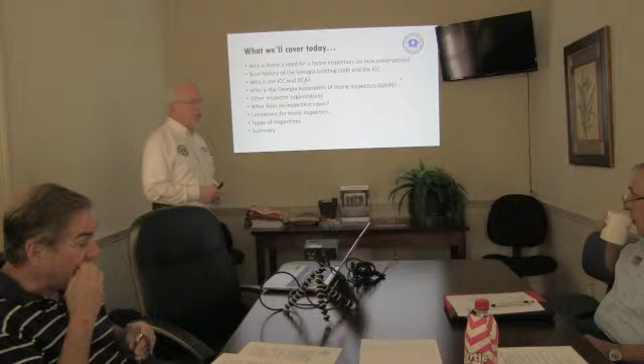GAHI is, to start off with the process here, we want to cover a variety of things today. To give you a beginning outline: we're going to say why you need a home inspection, and on home inspection on new construction, that's one of the public questions. We're going to talk about a brief history of the Georgia building codes and the ICC. We're going to talk about who the ICC is and who the DCA is. Some of you probably are not familiar with the DCA, but we'll talk about what that is. We'll talk about who the Georgia Association of Home Inspectors are, and a little bit of background on them. We're going to talk about other inspector organizations briefly, and we're going to talk about what an inspection covers, limitations, types of inspections, and then we'll have a summary.

So why is there a need to have a home inspection? A home is typically the largest investment your client makes in their lifetime in most cases. An inspection can save you money in the long run.

So what does that mean? It means that if you do an inspection on a pre-sale property, before you list the property, or the property being listed, have the property inspected - you then get the opportunity to see, before an inspector comes in from the buyer side, what issues there are and probably what you want your client, at least at that level, to look at, address, and deal with. It also provides a potential selling tool.

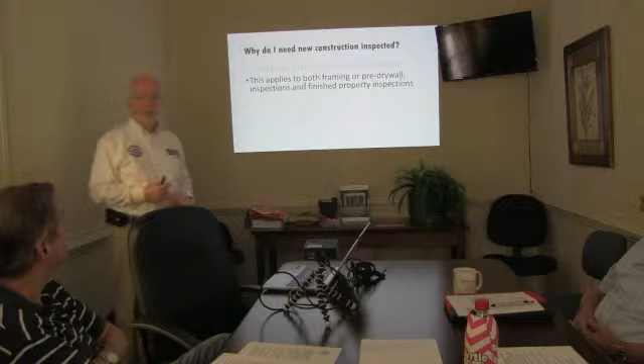This applies to both framing or pre-drywall inspections and finished properties. Probably the most common inspection process for new construction is what's called a two-phase. We've done hundreds of them. Larry Parkman and Richard, we all do phase inspections on new properties, meaning we come in most commonly at what's called a pre-drywall, where everything's put in place before drywall covers it up, and we inspect that. The second phase is the finished inspection.

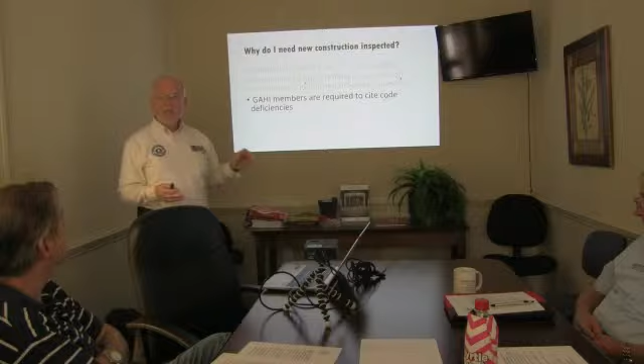GAHI members, Georgia Association of Home Inspectors, are required to cite code deficiencies. I'm sure many of you have worked with a builder who says, if I'm going to have a private inspector come in, he has to be code knowledgeable, because he doesn't want somebody who doesn't really understand the code citing stuff that isn't pertinent. And that does happen, we'll get into that shortly. Codes are key to any inspector. If your inspector doesn't know code, he shouldn't be getting out of his truck and telling you what's wrong with the house.

So what are codes and where do they come from? 1991 is when the state of Georgia first established a statewide mandated code system. Codes did exist prior to that, but they were left to the various counties and municipalities wherever a permit was issued to manage. The codes were out there, scattered, and varied in a number of ways. In 1991, Georgia adopted what's called CABO. Who's heard of CABO? Everybody's probably heard the term. It stands for Council of American Building Officials. CABO ended 15 years ago, by the way. CABO doesn't exist anymore.

The IRC, or ICC residential section, was adopted in 2000, effective 2001. Let me tell you what that is. The ICC is basically where CABO became absorbed. It went through several changes from 1991 up until 2000, and Georgia adopted the IRC 2000. There are a lot of acronyms in this. The IRC is International Residential Code, the ICC is International Code Council. In 2000, Georgia adopted the IRC 2000 for residential, since that's where we're focusing. It became effective in 2001. Residential code construction uses the IRC, International Residential Code, and that's the portion we're going to focus on.

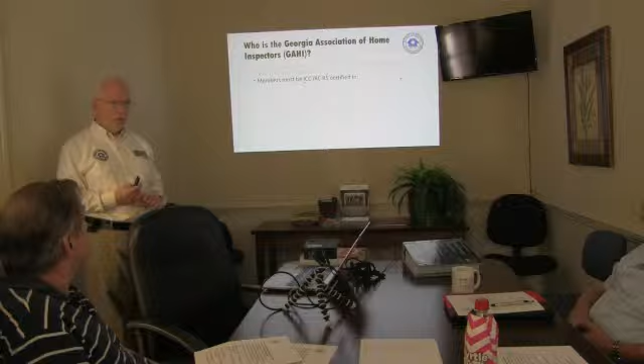But all GAHI members have to have taken the 4 tests administered by the ICC, a third-party entity. They could care less about GAHI, they could care less about ASHI, they could care less about any other organization. And I don't mean that figuratively—they certainly want them and want their support. But GAHI is the only professional association in this industry that makes this requirement of its inspectors.

Nationally, there is no, to our knowledge, other professional association in the inspection industry that makes that requirement—in the whole of the U.S.

Okay, Joe? Did I skip something? Yeah, Mike, Larry.

So is code certification required to become licensed in the state of Georgia?

We will get to licensing and talk about licensing as well. The R5 covers structural, mechanical, plumbing, and electrical. I said, okay, well, you just told me that the electrical and plumbing in this book, Georgia doesn't use.

Well, that's true, but the ICC issues the certification, and you have to become knowledgeable of what's in here. And if you know what's in here, you pretty well know what's in the other two, because all of that comes from these. It kind of comes back to a political issue as to who says what book they have to carry.

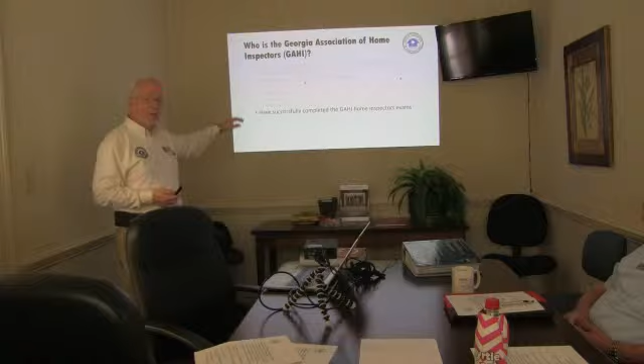We accept—we have this exam we administer ourselves. There's also a national home inspector's exam. If someone has taken that particular exam process, which ASHI also administers, we accept satisfactory completion of that process as well.

They have to have a minimum of 250 fee-paid inspections that conform to the standards of practice supplied by the Georgia Association of Home Inspectors. With 250 fee-paid inspections, they can then be classified a full certified member of the association.

We do have some tiered levels in our association. We have a beginning person who comes in classified as trained—they typically have upwards of about 50 home inspections that conform. Then we have another level called qualified, which means they've gone to 125. At 250 and beyond, then they conform and can be classified a full member of the association.

So you can see these guys have to have some experience behind them.

So Joe? Yes, ma'am. So if they do not have 250, can they not use that designation? Okay, the designation works this way.

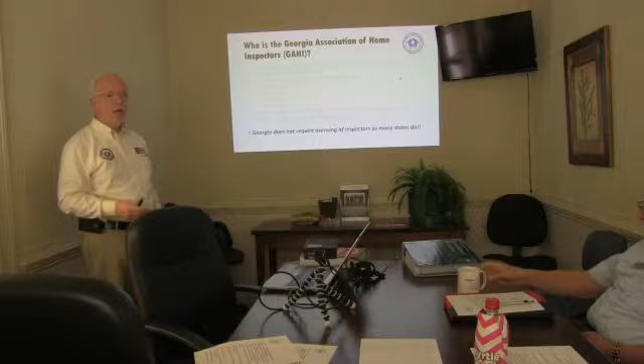At 125 fee-paid inspections that by our evaluation conforms reasonably to the standards of practice. The standards of practice covers a broad area, and every home doesn't have everything that's in the standards of practice. At 125, once that point, they then become available to use the GAHI label and name as a member of the association. Before that, they cannot do that. And we have found people trying to do that, and we have slapped their hands.

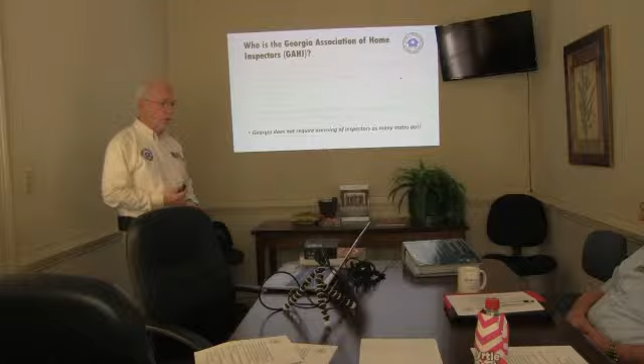Does somebody actually look at the inspections they've done? Yes, the procedure in this particular case is we have a membership committee, and someone who makes an application to us, the beginning level is applicant. Doesn't mean anything more than they filled out a form, maybe have taken a test, but probably are not ICC certified in any of the categories. But they've taken a methods test. They've also taken an ethics test. Every association has an ethical standard that they want their members to be knowledgeable of and adhere to.

Once they do that, then what happens is they tell, I've gotten to 50, fine, give me your list of 50, I'll pick 3 or 4 of them out. We look for particular types, new construction. Usually, new construction is going to be hard to do for a guy at a 50 level. At 125 level, likely, he may have at least a couple in there. But types of foundations, whether it's a crawl space, a basement, or a slab. And we look at those things in relationship to the codes of standard, codes of practice. And if they're in compliance, then we give them the approval to move to the next level. So that's the process.

So who are other associations? I think everyone knows who ASHI is. ASHI is a national organization, been around a long time, have many members. They're a very large organization. They're ASHI members all over the state of Georgia. InterNACHI, a more recent organization, same thing. International Association of Certified Home Inspectors. That's what all those letters mean in there.

NAHI, and we've just recently been informed, I don't have this for an absolute, but NAHI has dissolved. NAHI, National Association of Home Inspectors, to our understanding, and I can't take this necessarily to the bank, but we decided to leave this up here just from the standpoint of saying we're not sure about them. None of those say to be a part of our association you have to know what code says. Okay, enough said.

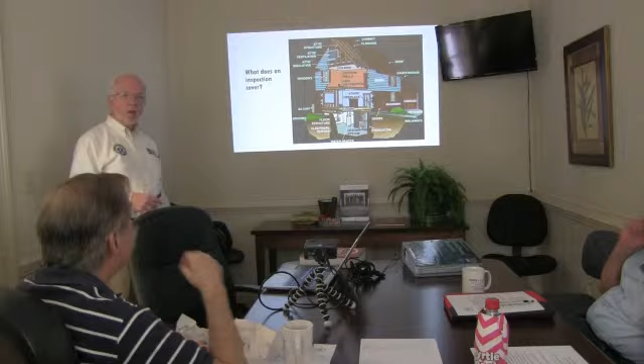So, what is a home inspection? Every topic you see on that board has multiple elements below it. These are purely topical areas. An inspector has to look at every one of these things, and in each category has to know a vast number of things to examine and look for. Basic home inspection - that's what a home inspection is all about, what's going on.

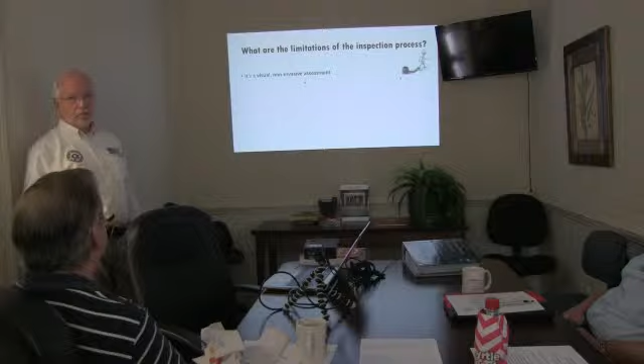But a home inspector also has limitations, things he's not required to do and really can't do. It's a visual, non-invasive inspection, meaning he doesn't go digging holes in walls, that type of thing. It's basically a visual inspection, just like the homeowner would all of a sudden discover something that he sees. An inspector doesn't provide an estimate of the remaining life of the home, structure, anything mechanical, roof, etc. He has no way of knowing how long something's going to last.

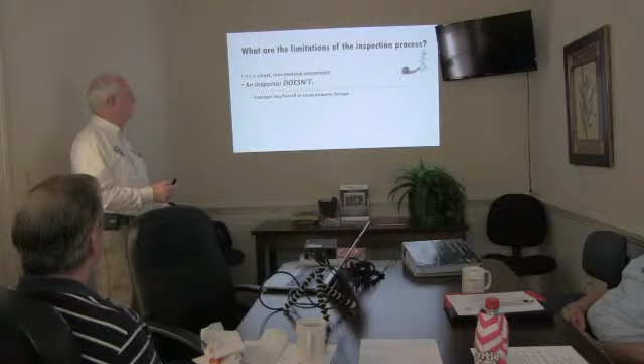Report on conditions of septic systems and related septic components - an inspector looking at a house cannot tell you what the condition of that septic tank is, period. That belongs to someone who services, maintains, installs septic systems. Now, there are sometimes obvious things he can see, like a drain field that's sunken in all over the place, and you can see where the drain field goes. That becomes kind of an obvious thing, and his intent is to report a potential condition issue that warrants further investigation by a qualified professional. Or a drain field that's sopping wet and everything's perking to the surface and it stinks like crazy. Those are two obvious things, but beyond that, he cannot tell you what is in the ground and the condition of that septic system.

Just can't do it. Ignite fuel systems other than those having a switch control, like a gas cook surface - you light that, that's fine. But an installed gas log system that has a switch control on it, if it's something that requires sticking a match in there, he's not required to do that, because we have no way of knowing what's going on - your battery is running low, whatever.

Joe, can an inspector turn on the water at the street? An inspector can do anything he wants to do that he takes responsibility for. So I'll touch on turning on water at streets, things of that nature. If you have a house where the water's been turned off, but it's available to be turned on, not locked off - obviously if it's locked off, he couldn't do it in any case - he assumes then the responsibility to do that if he chooses to do that.

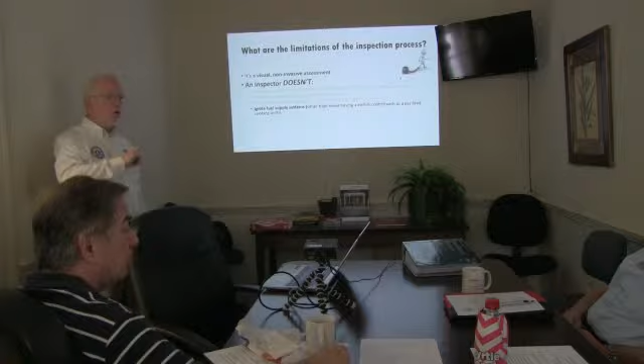That's actually our responsibility as agents. I write it into contracts that the seller will have all utilities functioning. It's the seller's responsibility - utilities not functioning inside the house is not ours, because our inspection process is to be no different than the homeowner or home buyer walking in that house and beginning to live in it. Power on, water on, gas on if gas is there. We're not turning those things on because we have no knowledge as to why they're not. A contractor coming in and doing the assessment is already thinking, all right, there's a problem, I've got to do something to find out where the problem starts, and then from that point he can take over.

That's not... You must love HUD homes. I'm sorry? You must love HUD homes.

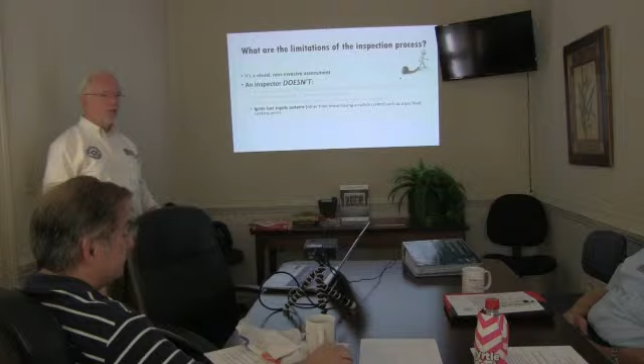I don't mind HUD homes because HUD has a requirement when it comes to inspecting a home - it requires that before the inspection takes place, all of these things have to be functional. What I dislike are bank-owned properties. Banks have gotten smart since 2008 on properties they used to own. They realized in a variety of ways, not just from the standpoint of utilities, but also painting the green and purple walls beige - we've all seen those. Anyways, operate heating units, heating and cooling systems.

There's a limitation so far as running heating systems. This time of year, obviously we're going to run it. In the summertime, when it's 90 degrees outside, we're not going to run it. Now I will do what I call a bump run - I'll turn it on to make sure it comes on, but I'm not going to push heat in the house.

But obviously in the wintertime, the converse situation exists. With a conventional AC system, if you run an AC compressor when the temperature outside is 40 degrees, you've just bought a compressor. When you get to temperatures basically below 65 degrees over a 24-hour period, the viscosity level of the lubricant in that compressor is like Jell-O. If it doesn't connect up fast enough, you can destroy a compressor that otherwise probably would have had another 6 months to a year's worth of life in it.

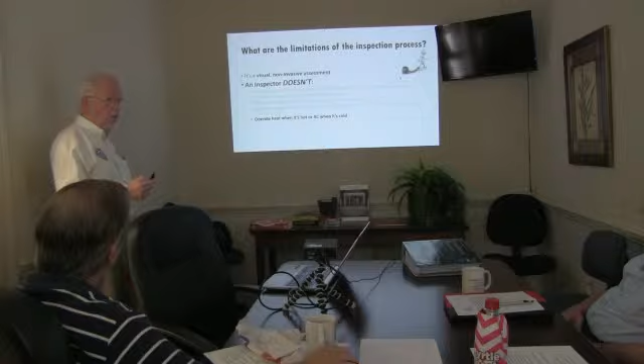So we do not turn AC systems on when the outside temperature is 65 degrees or below for a 24-hour period. I have done it when the temperature was roughly 63, 64 - I'll go out and check the thermostat, check the temperature on the compressor, and if it's within that area and it's a relatively recent compressor, I'll turn it on to see if it's pumping cold air, but I'm not going to do what's called a delta difference between the supply and the return. I will do a supply and return on heating, but not on cooling. As the seasons change, it does make the inspection process a little longer in the fall and spring because we're doing both.

We don't provide solutions for condition issues. Solutions mean telling you what the problem is and how to correct it - that belongs to a professional contractor. We don't report on cosmetic issues, that has to do with the inside of the house. We don't operate and report on lawn irrigation systems, swimming pool equipment, except for safety. When it comes to a swimming pool, we do look at the condition of the protective element around it and any electrical components, but we do not look at the pool equipment itself as a standard.

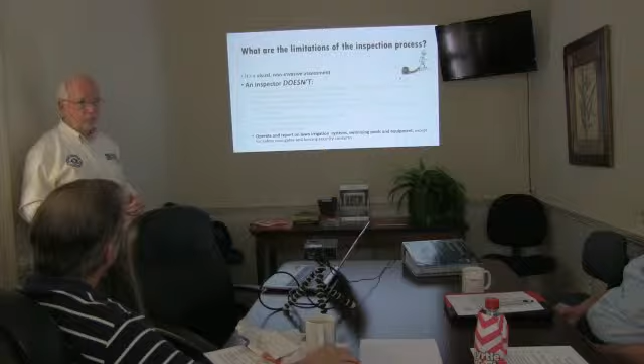So home inspections, standard - what we do every day, looking at the house from top to bottom, inside and out, on the center process. Maintenance and pre-sale inspections are types we do. Sometimes we're called to do a maintenance inspection, sometimes a pre-sale inspection. We probably do more pre-sale inspections than maintenance inspections, but that's a specialized inspection.

Specific limited inspections basically fall into the maintenance category - that's where someone wants us to look at a specific thing. Like, 'I just had a deck put on my house and I have an issue, can you come take a look at it.' That kind of thing is a limited inspection.

New construction phase inspections - pre-pour foundation, I've done a number of those. That's called a three-phase inspection, probably the least common, but it's the process where everything is set up prior to the pour being done. Probably one of the most difficult to coordinate because when the builder's ready for that thing to be poured, he doesn't want to wait 3 or 4 days for an inspector to come out and do his inspection besides what the county's already done.

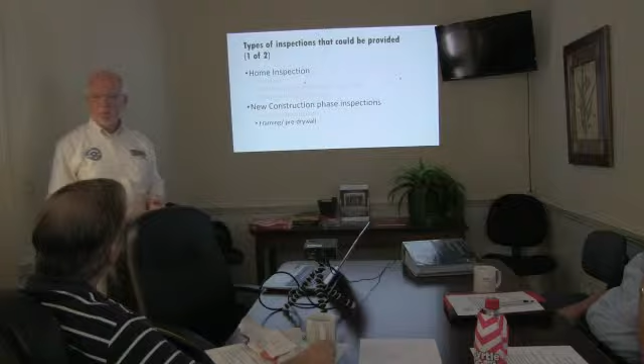How many of those do you do on a percentage basis of your total business? Less than 1% on a foundation, in general on new construction. Last year I did 2 where I actually did a foundation inspection - they were both slabs. Basically what we're doing is looking at the framing element to see it's installed correctly, and doing some element of pressure testing, although not geo testing like a compaction level. I do a type of probe around in some areas, and if the probe gets into the ground less than a foot, I don't find a problem.

If my probe goes into the ground that far, then I've got a problem, because that area is too wet at that stage for them to pour in there for it to substantially hold itself in place. Did find that one time last year.

Pre-drywall finished inspections, obviously the property's completed and the builder says, okay, I'm ready to go. At the time of the CO, yeah, that's at the time of the CO, okay?

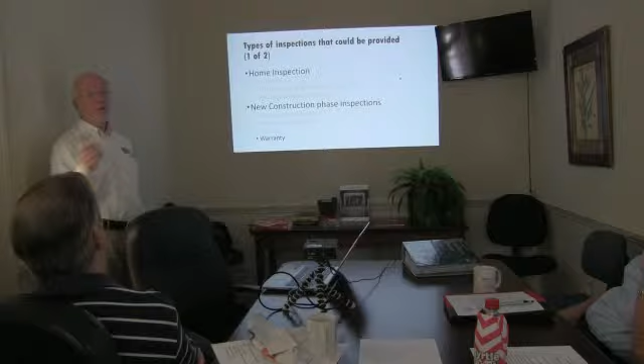And then warranty inspections kind of come about at the far end, the other end of the process, new construction. Somebody will call, I'm coming up on my 1-year warranty, will you come and take a look at my house and see what you could find? And then I ask, who did the first inspection? Well, I want a different set of eyes. That's fine, that tells me a lot.

Joe, if I could interject, one of the issues about this is the pre-pour of the foundation. If you can get there, they can call you out before they start pouring cement. But in that code book, the foundation requires these foundations to be so far below frost level. And if that foundation is on more than 2 feet of compacted or uncompacted soil, it's got to be engineered. There's a lot of things to look at, and this new Ufer grounding system. And once that cement's poured, none of that is visible. That's the whole thing the whole house sits on.

It's really important. On the pre-pour foundation, there's a variety of things to be examined. And the county, I will say, the probability of that inspection, the county inspection, is probably more accurate because it's not, in most cases, a very complicated inspection. But it is probably the one beginning inspection that they probably get right almost every time. Can't swear to it 100%, but almost every time.

Options: termite pest control inspections. Termite inspections, that is a licensure process by the state, by the way. So if an inspector is supplying a letter and doing a termite inspection on an inspection process, he has to be licensed. And that license, just like your real estate license, has to be with a bonded pest control company. So he's doing an inspection for real estate, for a pest control company. That's fine.

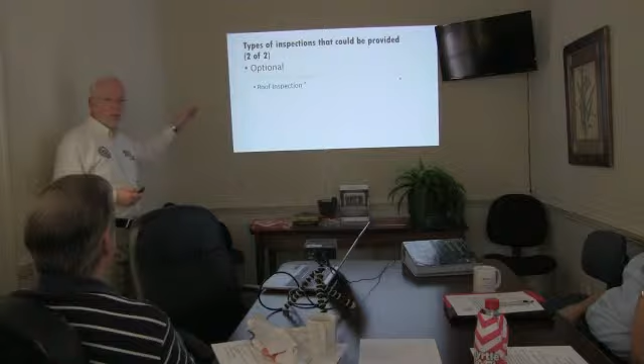Roofing inspections, just what they are. Roofing inspections, pool inspections, this is an inspection that an inspector, a property inspector, can do if he's qualified. Most of the guys don't do this. Again, that inspector maybe looks at a couple a week during the summertime. I would want a guy who looks at 7 or 8 a day. So it's kind of logical.

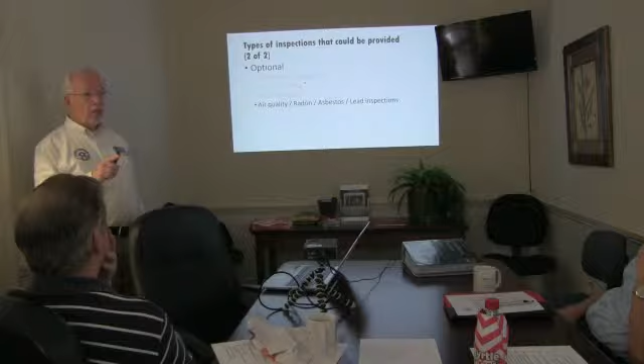Air quality, radon, asbestos, lead inspections. Those are all inspections that require a qualifying process. You have to be knowledgeable. I am CRMI certified, that's air quality, that deals with mold inspections. Richard and I are both radon measurement assessment certified. I can do asbestos testing and I can do lead inspections, and so can you. However, there is a distinctive difference between those 2 processes based upon the EPA guidelines. You cannot do an asbestos inspection on a property that's being torn down, because the county municipality is going to want an EPA letter from that unless you're licensed to do it.

If you want to do a lead inspection, there are 2 processes. One is a swab spot test that you can go to Ace Hardware, and then maybe even now Home Depot has it.

Buy the kit, look at it, read the instructions, and do the test right there on the spot. The other process involves a guy who carries a $10,000-plus instrument with a radioisotope in it. He has to be licensed by the EPA to do it. The first test, the spot test, is not a probative test. The other test is.

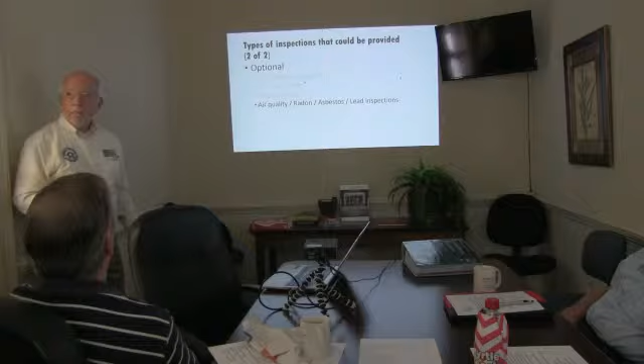He basically comes up to a piece of paint and puts the Geiger counter on it. If it registers as lead-based paint, he makes his notations and supplies you with a report. Will that look through 5, 10, 15 layers of paint? It probably could. This device is designed to look for a response based on a signal it produces. It's, in essence, like a Geiger counter. They charge well for it, and it's an expensive process. The average cost is probably $1,200 to $1,500 for the guy to go in there and do that.

So, just say, don't eat the paint. The good thing about asbestos and the thing about lead is if you keep it encapsulated and don't disturb it, you're just fine, okay?

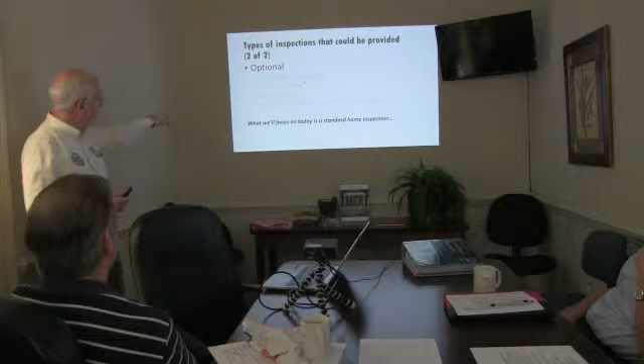What we'll focus on today is the standard home inspection. If we have the opportunity, we will touch on those last four things toward the end of the whole process.

So, in summary, we talked about who the ICC and IRC are, code knowledge and what the key element is with code knowledge, and we talked about GAHI and who we are. We're the only organization that makes that requirement for the guy who looks at your property. And we covered why we need a home inspection and the types and limitations of inspections.

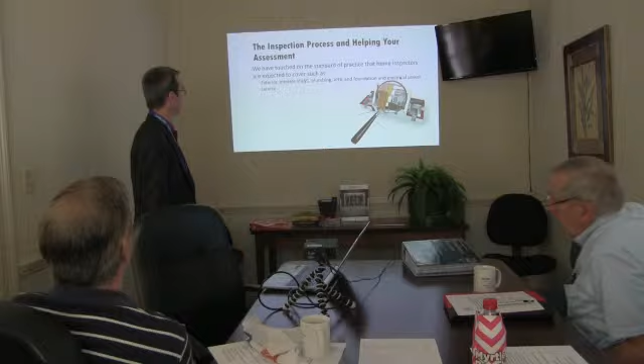We're not talking about the structure or organization of a home inspection company or the authority behind it, but we're going to talk about things that home inspectors actually look at, the limitations we have in each individual area, and what we cover during an inspection. We've touched on the standards of practice, but let's go a little further with that and hitting the codes. Just like with new construction, but mainly on resales, we're going to cover damage, defects, design flaws, and safety issues. We're really required to cover those to protect our clients.

Now we're going to go further into what a home inspector actually covers. You have the interior inspections, which include the mechanical, plumbing, electrical, and then a room-by-room assessment.

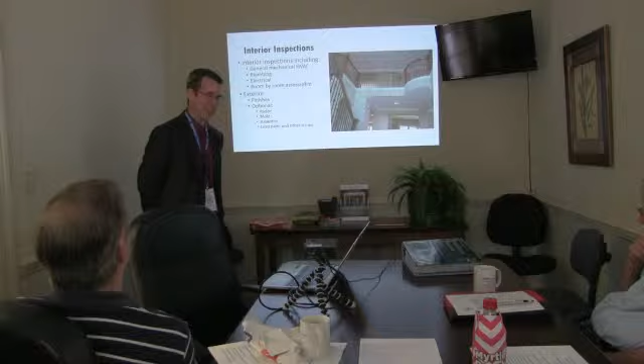And then the exterior: we have the exterior finishes, roof, siding, grounds, and so forth. And then optional, as we talked about, radon, mold, asbestos, and so forth. Let's just get into the heating and air.

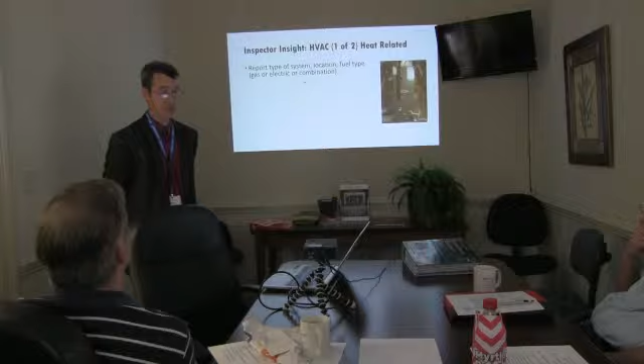What an inspector is supposed to report on is the location, the fuel type, and type of system it is, whether it be gas, electric, or a combination. Sometimes it's a little difficult to find out if it's a piggyback system, as in a combination—a gas-fired system that uses a heat pump portion of the time, and if the temperature gets too low, it kicks into gas. It's difficult to tell on some units whether it is a dual system.

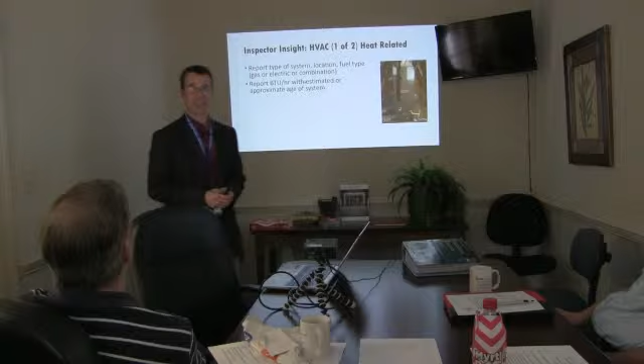So, and then Richard, operate the heating system.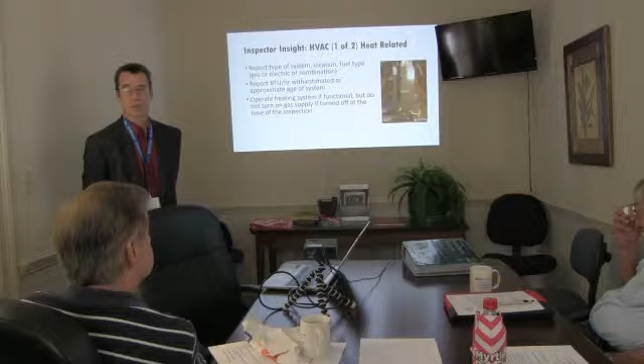To your point about this heat strip on a heat pump at emergency, I always try to inform my clients, taking them to the thermostat and showing them the settings. It's real important on that heat pump, because when it's set in standard heat mode, under certain conditions, if it's extremely cold out, that resistive heating system will kick in temporarily. But always warn them to keep an eye on it, because if it comes on and stays on, you have a problem, because you're heating only with resistive strips.

They have to flip it back, or it could be the same problem as the air conditioning - could simply be low on Freon. Or they could accidentally push it over into emergency mode and end up heating only with the strip heat. So it's real important to educate people on how that works and what to look for.

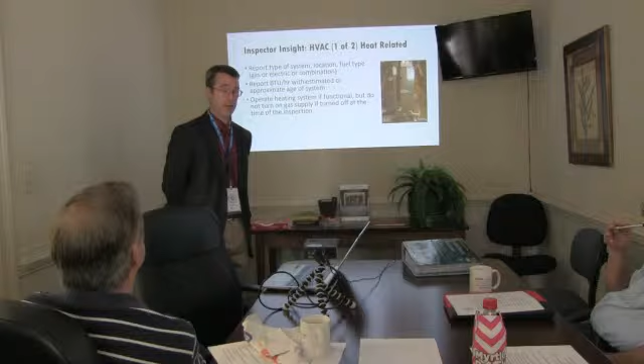As far as operating a system, we'll operate it and check to make sure the heat pump is kicking on before the strip heat. We'll operate a gas furnace, assuming the gas is on and it's ready to operate. If the gas is off at the outside of the house or off at the unit, there's no standard practice that would have us turn it on, because of the liability.

We inspect the gas ventilation for gas-fired units and report on any deficiency or defects. So it's the gas part of a furnace we'll also check.

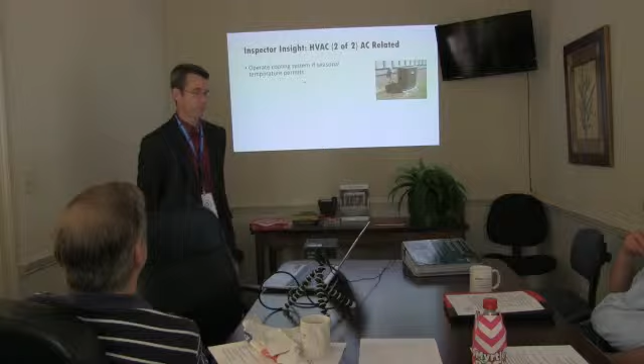This is your AC compressor outside unit, and it could also be a heat pump. You can sometimes find that on the model number, though sometimes it's a little difficult to determine. We do operate the AC in the cool time of the month. Joe mentioned that if it's been below 60 over the previous 24 hours, we won't be checking it. I actually do like Joe - I turn it on, make sure it's cooling, but I don't register whether the temperature drop is proper.

We report on the cooling system, the location of the AC units, and basic capacity of the units. We can give you a rough figure on what all the ACs combined will service, how many square feet. We don't measure the house, so we won't say this serviced 3,000 square feet and it's too small, because we didn't take a measurement. We don't go that route - that's the appraiser's job, to measure the size of the house.

And then we inspect the filtration system and report on its condition. We just check the filter.

Question on the HVAC - do you ever estimate the estimated life of the unit? I've seen inspectors do this before.

We're not required to. Some will say that an AC typically lasts 10 to 12, 13 years. The way I report it, I'll say the unit is 8 years old and then leave it. We leave the math to them, because there is no... go ahead Joe, you explain this.

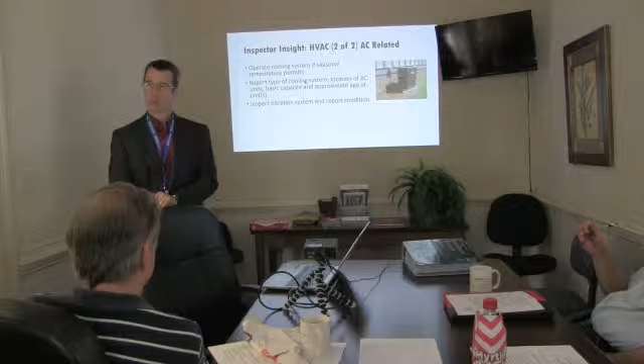The information label on the unit, if legible, provides two important sets of numbers. The model number specifies a variety of things, including the size of the unit and its tonnage capacity. The other is the serial number, and unless the label specifically states the manufacturing date, that serial number has the manufacturing date coded into it. From that, we can tell you the manufacturing age of the unit. That does not specify the service age. Usually an item manufactured January 2012 probably went into service somewhere between then and June - roughly 6 months or less on an HVAC company's shelf.

So we basically look at a unit and consider the average life of a compressor, depending on its type. An AC system is probably going to run a little longer than a heat pump system, because a heat pump is designed to run 365 days in its range. But say in the range of anywhere from 10 to 15 years, give or take. I will tell you that if it's running when I leave, it's running and working.

It can die tomorrow, and I cannot tell you. You have no liability. I cannot predict the future.

We can say if it's operating in the proper temperature drop or reduction. If it's 3 or 4 years old, you would expect it to still have a warranty.

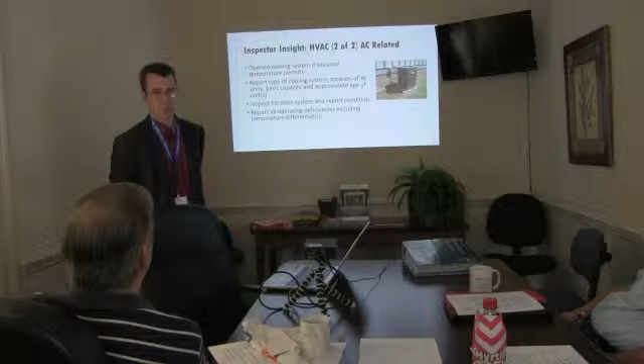That's the difference in temperature between the supply and the return. The standard is 15 degrees. We actually use laser thermometers to check all the different supplies and registers in the house, checking to see if this one is as cold as that one, within a few degrees, so we can tell if there's something wrong with the ductwork, like if it's disconnected.

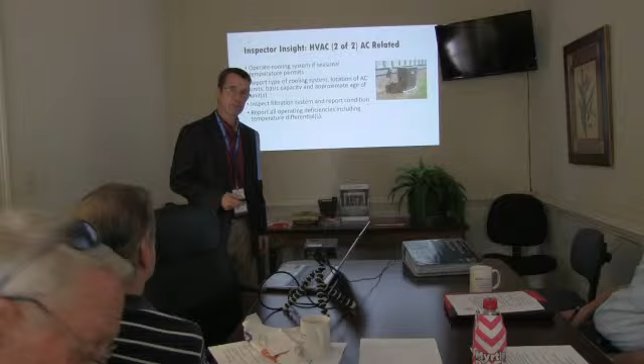Also, from that model number, you can determine the SEER rating, the seasonal energy efficiency ratio. As of January 1, 2015, the least energy efficiency rated system they can install or manufacture in the States is a SEER 14.

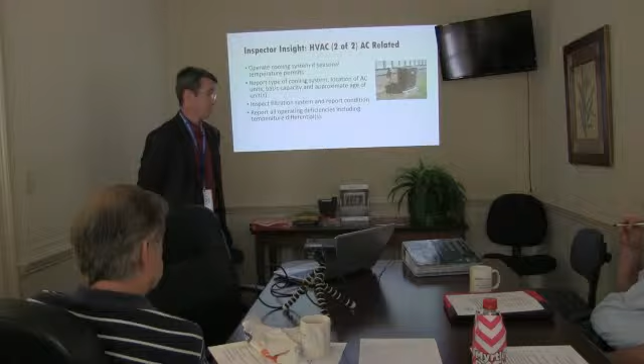Some of these home warranties have an exclusion, and they'll exclude any components that don't meet current standards. Some of the older units are still the old SEER 10s, which are no longer manufactured, so those home warranties will tell you, if those go out, they're not going to replace them because they can't get them anymore.

That's something we need to check, the Freon too. We went from SEER 10 to SEER 12 and then to SEER 13. When we went to 12 and 13, the Freon gas material changed from R22 to R410A, and from that point forward. But SEER 14 today is the least SEER rating that's available.

I've looked at houses that have SEER 17s and SEER 18s. Your SEER rating can be well on up there if they want to spend the money for it.

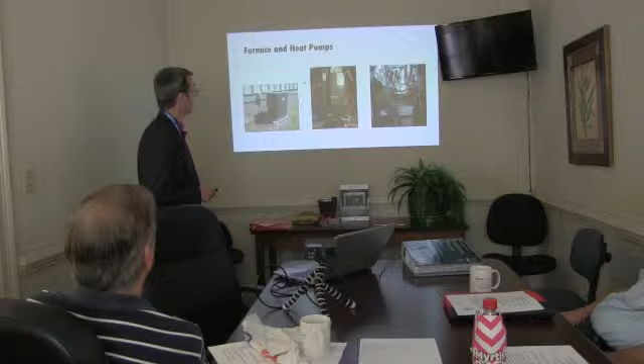This is an example of your gas unit, and you can tell by the incoming gas line and the vent right there.

But this is the heat pump unit. There's hardly anything you can actually inspect on a heat pump furnace, except for things attached to it coming off, and you can't take any covers off. That's a licensure barrier that we can't cross.

On a gas-fired system, the panels are basically most of the time manually removable without screws. That would be the one on the side. We took the cover off there, and you can actually see the rust accumulation.

That's the electric unit, and we typically don't remove the panel covers over those. There's really nothing to examine.

The only reason you pull the panel covers off of the gas unit is because you want to examine what's taking place on the inside of that system, because that's where carbon monoxide is assessed in that industry.

Is the key to it the screws? In other words, if it snaps off, you can do it, but if it's screwed, you can't take the screws out? Not always. Sometimes it's just a lift-off cover, sometimes they're thumb screws, sometimes they're little toggles.

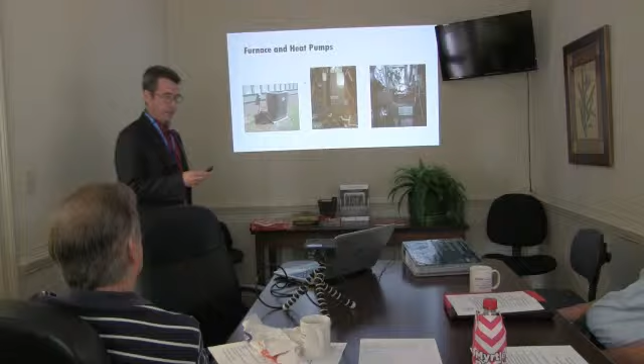But they're made to open sometimes so you're able to put a filter in there if you've got a system that has a filter that goes in the bottom plenum. It's also where you find the model numbers. That's one of the reasons we also take the cover off, to see what the sizing of the unit is.

What is BTU rating? As far as filters go, even for your own house, you can determine the airflow to a furnace. Sometimes filters have a directional arrow on them and you don't know which way it should point. What you do is find the filter location - in this case it's down here - and I actually know the airflow direction without seeing anything else about the system.

To remember which way the airflow goes, the air always gets filtered before it goes through the unit. If it's on the side, it could be on the right or the left, it just depends on how they set it up. But if you find the filter and then find the unit, you know the airflow is toward the unit from the filter.

That's good info. Yeah, it's just one of those things. You'd be surprised how many we find installed wrong - I'd say at least a third of them. It's a 50-50 chance putting them in, and we don't turn them around once we find them wrong, because all you're doing is taking all the dirt that's on that side and putting it to the inside.

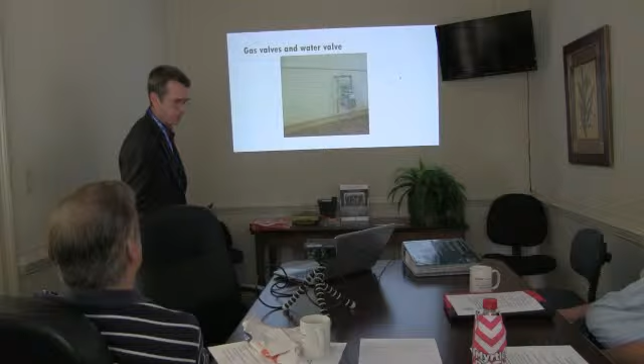So, gas valves and water valves - we're going to just touch on that, and I think this is actually good information for a realtor to know. This is your gas meter, and they have cutoffs at the meter.

If we get a close-up here, if you don't have a meter on the outside of the house, the gas is either non-existent or off, locked off or something. There's an example of it being locked off, and that's something you can't even get off with bolt cutters - it's from the gas company. You can tell it's off, and even if that lock wasn't there, you can tell because the holes line up in order to put a lock there so you know it's off.

Right on the other side of that is the valve - it's how you turn the gas on and off. If the plumbing runs in one direction and the valve is perpendicular to it, it's off. If it's in line, then it's free flow. That's how you determine if it's off. To turn it off, just take a wrench and turn it clockwise 90 degrees. It's a ball valve - the product, water or gas, goes through that hole, and if it's sideways, it can't get through. That's the philosophy behind it.

This, on the other hand, is a water valve - same idea, it's a ball valve. It's a 90-degree turn, just turn it clockwise. This one is in line, so the water's on. If it was perpendicular, the water would be off.

This is called a gate valve - also a water valve, and this is the type you screw in. It's actually a screw, and they call it a gate because in the water line there's something that shuts off the water. As you screw it in, it closes the flow of water.

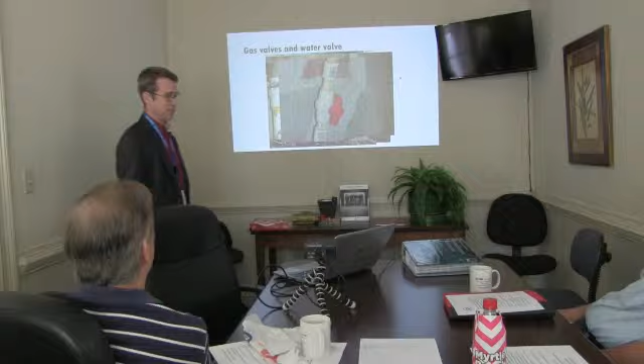This is also a ball valve, for plastic water lines. I particularly don't like these - I've got a few of them on my house, CPVC, but they're often difficult to turn.

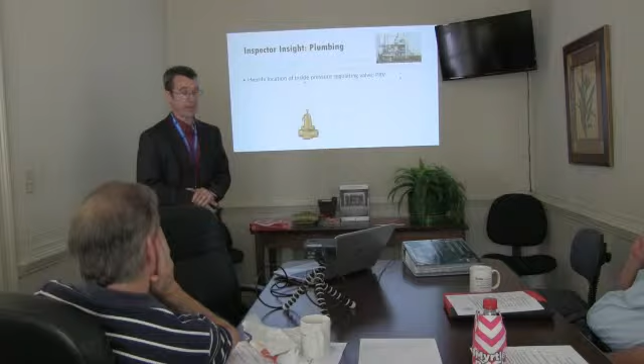The water pressure standard is required to be between 40 and 80. Most of the pressure regulating valves we see are set at 60. If you see this, you know it's definitely a municipal system - water comes in at the street at about 120, give or take a little, and it reduces down to 60.

Everybody wants big water pressure - no, they don't want big water pressure, they want volume at the shower. Recently they've restricted the flow on showers, and everybody says I can't even get wet, I want water. You need enough pressure to get it there, but volume at the shower is what you're looking for. If you get pressure too high, above 80, you risk damaging your fixtures, and big water leaks and so forth.

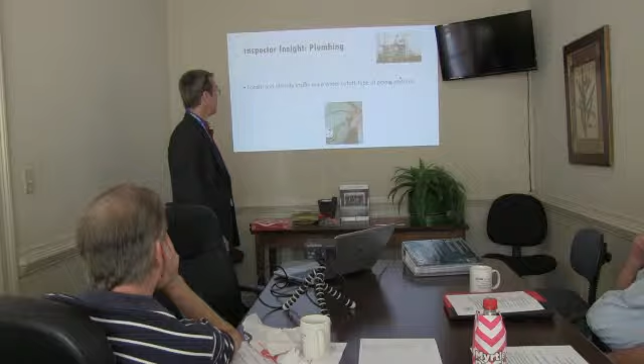And then we also mention where the water cutoff is and what type of material it is. And we identify the sanitary waste disposal system, your septic tank.

I'd say a large majority of the time, if you have a property that's kind of rural but kind of close to the city, there's no way you can tell. In half the cases, there's probably no way you can tell if it's a septic system, or if the septic system was there and the sewer was close, so they actually attached to it. You don't know which one it is. So most of the time, I just say look at the water bill.

Then you'll know if you're being charged incorrectly or not. So if you do have, on the bottom right, you'll see that is the septic alert system.

This comes with property that's usually a little close in, house to house. If you have a septic system, everybody has three quarters of an acre to an acre. And you have a big downhill towards the house, your field lines, your septic filtration, your line system actually has to get elevated. So it's a double tank system. Gravity feeds that first tank with the alarm on it, and then it gets pumped to another tank where they actually feed the line system.

So there are two septic tanks? Two septic tanks. If the pump ever stops working, you'll see an alarm like this. The alarm is in the event that the pump isn't working getting it up to the next one, then you get notified before you have a full house.

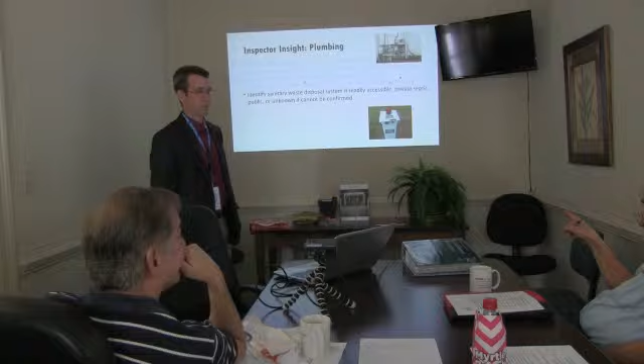I actually had this system when I had my house inspected when it was new. One of the things that came up was, I'm on a basement and the electricity supply to the pump was wired through the GFCI, which was on the outside outlet on the basement door. First thing I would do is go to the store and get one of those things you can plug in, and if it doesn't have power, it lights up and chirps. It'll warn you that something needs to be rewired, but that's an easy fix.

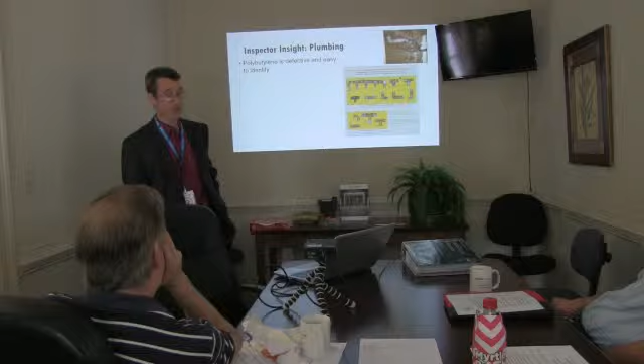So polybutylene is actually rather easy to identify. It's gray, like the electric gray pipe, and sometimes I get it confused. You have to look closely, but you'll have a number of different types of fittings on there. Started out with plastic, went to aluminum, then went to copper.

They say if you have copper fittings, it's great. Nope, I've got a plastics background. Polybutylene is great, but if it's made out of tolerance, you'll get pitting, chipping, flaking, cracking, breaking. Wasn't it that they blamed the problem on the fittings rather than the pipe? No, well, yes, in part, but in part it also had to do with the pipe.

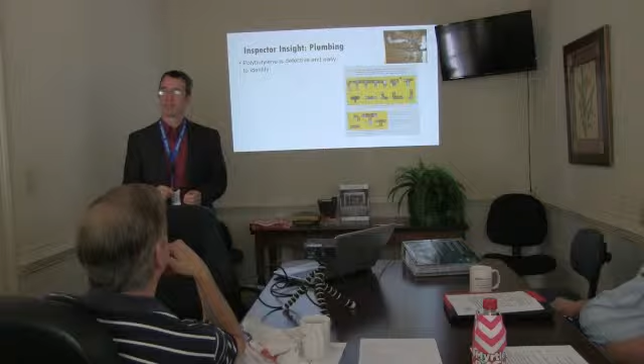Chemical interactions, probably didn't have as much of an issue on this end, but in Atlanta downtown, where you're dealing with fluoridation and chlorination in the water supply system, it became a chemical reaction.

So they are disappearing, but you can take a quick cursory look and find it, at the water heater, the lines coming off there. Sometimes they'll change those but leave it in the wall, and it's difficult. If we can't see it, we can't inspect it.

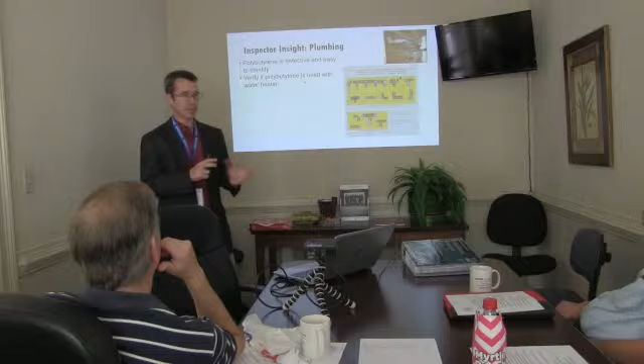Let me touch base on something Joe was alluding to. I want to make it clear: we are not a specialist in anything. We're not licensed electricians, we're not licensed plumbers, we're not licensed heating and air, we're not structural engineers. We are general practitioners. If you have a heart problem, you go to your general practitioner and he says you've got a heart problem, you need to go to a specialist. So we know a good deal about all aspects of a house and how they work together, so we can typically find things and direct you to the correct location. We run everything that should be run, operate everything that should be operated, and just report on what we find.

So if you find polybutylene, you'll see it as the gray pipe coming into the valve. The right picture has a gray pipe coming off - they've never had a problem with that. I'm not 100% sure it's polybutylene, but it is gray. The red pipe is PEX. The gray pipe on the right side coming up from the floor level, that is polybutylene.

This is probably one of the easiest ways of identifying it - look under a cabinet. Underneath the sink, on the left side you have the gray pipe. That is the polybutylene. If you look closely, you can see a PB and a few numbers after it. They're different numbers, but PB is a dead giveaway for polybutylene.

Let me just quickly interject here. The piece of piping that's above that valve, on either side, that leads to the bottom of the faucet, that too is polybutylene, but it is not part of the issue with the primary jointed piping. That's also polybutylene, but the other piping above it is not a problem. It's the other primary piping that's through the walls in areas like you're seeing here.

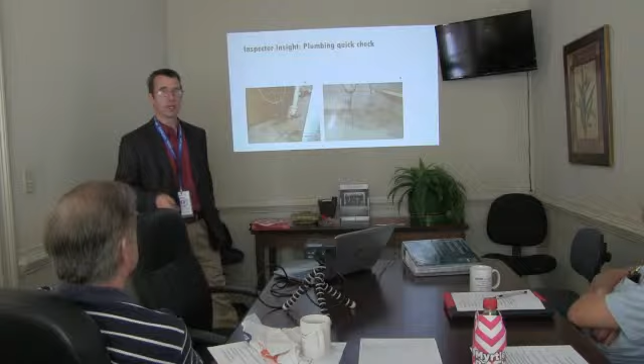And then of course we have the blue poly that comes from the street, the 1 inch, and it's an abrasive issue if it goes through anything abrasive and you have leaks. And it seems to be disappearing.

We'll have a handout for you about the information that helps you organize this. But years between 1985 and 1995, this seemed to be an issue. So if you have a house within that year frame, then that's the one you need to look a little bit closer at.

So you look under the cabinets, you look for water stains on ceilings that are underneath the plumbing, and then look at the baseboards too. You can see evidence of any mold and any past water problems from that.

Now, water heaters - we mentioned the location, just generally where it is, and the cutoffs. There are 3 different types of cutoffs. You have the water cutoff, usually on the cold water side, and we usually operate it to make sure it's free and clear.

The electric cutoff - if this was an electric water heater, then within sight you're supposed to have a pull or disconnect, so the plumber working on it can visually see it's off. In this case, if it were electric, he can see the electrical panel right next to it. Then there's the gas cutoff, which is still that 90-degree cutoff valve.

On gas units, we check the venting, make sure it has the right slope and is connected properly, with no evidence of rust or problems with it.

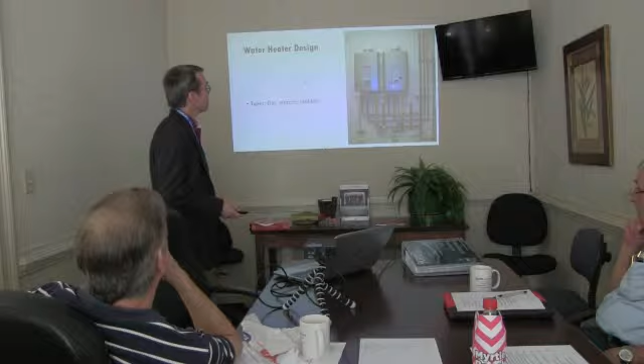Is that a warning light on top? No, those are vents - up top is the vent. Do they have to be vented outside? They are, yes, that's an exterior wall - it just turns here, expelling and intake combustion, both. And this is the safety valve.

We're doing on time, a little bit over.

I've got one of those right here, and this is probably, I believe, one of the most important valves of your house. It's the temperature pressure relief, the TPR - temperature pressure relief regulator valve.

It is just a pin, and this right here should spin really easy. It's just a pin that goes through on a spring. If the temperature or the pressure goes crazy in your water heater, then this opens up and allows superheated water or just releases the pressure out of the house.

So this is actually a good maintenance tip - just make sure this operates. You're supposed to test it once a year.

So what happens if you don't have a safety valve, or it gets rusty and seized up? Sometimes, if it's discharging to a safe place from my client, I'll actually break the seal and let it drip outside or something and say it's seized up. It's a very significant safety issue - I'll even tell the owners of the house.

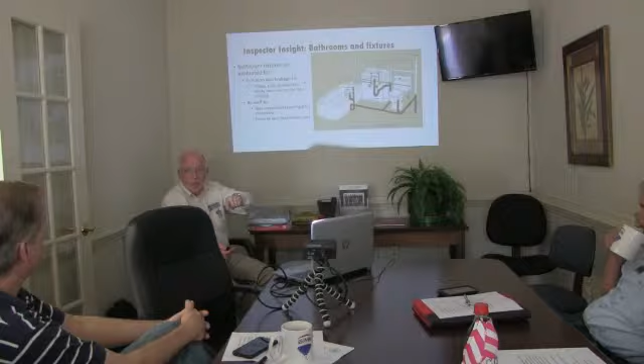All kitchen receptacles today, whether within 6 foot of a water source or not, are required to be GFCI protected, as well as all receptacles in bathrooms. That's standard code today. It evolved into the system beginning in the mid to early 80s, and that's before Georgia implemented the standard for the state. It then became a requirement for each of those municipalities. It's interesting that when you go into a house built in 1989 or 1990 and don't find GFCIs, it's prior to the Georgia code, but it was already in the NEC code.

But you do label it in your inspection? Absolutely. Any good inspector should do that. But whether they make the correction or not is up to the buyer itself. Richard probably has a similar comment in his report. I comment basically that GFCIs were not a standard for this age of house at the time, but it's highly recommended that he place them, et cetera and so forth.

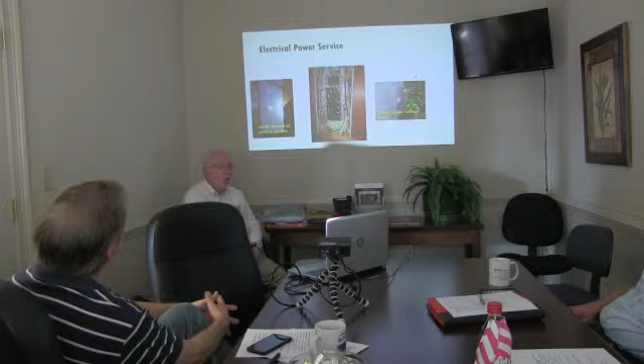Three different variations here, in a manner of speaking. The picture on your left is a standard electrical panel you typically see in a home. Just to the left of that, you see what's called a sub-panel, which is another electrical system taken off of the primary panel. The middle picture shows that every inspector should remove the electrical panel cover if possible. I looked at a YouTube video within the last two or three weeks, just to see what people out there are saying, and I found an instructor saying unless you're a qualified electrician, you should not remove the panel cover. And I'm saying to myself, if you're an inspector and you don't remove the panel cover, you're not doing your job.

So in this case, what we're looking at here is two electrical panels, and what we're showing here is the main disconnect. Just about all electrical systems today have a common main disconnect. There are older systems - the house I looked at this past Monday had what's called a split bus, which simply means all your 240 volt breakers cut all the breakers off to 240 volt services. Then you have one or two 240 volt breakers that cut off everything that's 120. Today, one breaker cuts everything, boom, one time. What you're seeing over here is where this main disconnect is now actually outside at the meter.

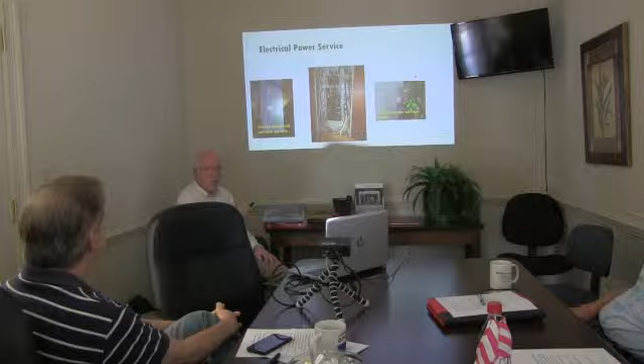And that's very common today. The reason it's on the outside of the house is the same reason the gas meter is on the outside of the house - because if there's a fire, the first two things the fireman's going to do is cut power and turn off the gas to the house before he lays an axe in anything, because he wants to see tomorrow.

Okay, inspection points for electrical services, one through three. Report locations for main power and source - we're commenting on where the main source comes in from, whether overhead or underground, and we're commenting as to where the meter's located as well.

We're reporting the service amperage. The common amperage today on most all houses is 200 amp. 150 is not uncommon at all - thousands of houses were built with 150 amp service. It cannot be below 100 amps. I don't know of anybody building a house today with 100 amps, but it cannot be below 100 amp and be an inhabitable, what's called a habitable location.

Report on main disconnect locations, whether it's the meter or the main load panel - they're basically main panels, load panels, feed panels, however they want to be classified. Identify ground and bonding type and systems. Today, Larry was mentioning UFER, if you remember a minute ago.

UFER grounding systems are the approved grounding systems for electrical. That's a grounding wire that runs from the electrical panel source and or from the meter itself, where the main disconnect is located, to a rebar material in the foundation, and then it's clamped to it. The older systems are driven rods that go into the ground, and before that they were bonded to copper water piping material, which at some point had plastic introduced, and it's no longer a grounding system. The plastic changes the whole thing.

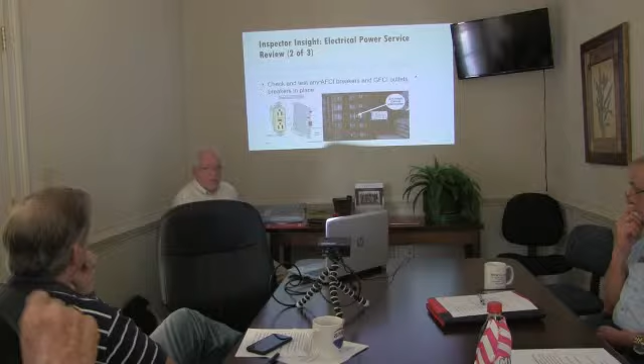Aluminum coming to the house is not a problem. It's a very large strand wire, lugged down extremely tight, expected to be. And then there's also what's called a corrosive retardant material on there, because you can get some issues with current going through aluminum into copper. Those also have issues in it.

We're checking for electrical systems, AFCIs and GFCIs. We hadn't mentioned AFCIs yet - arc fault circuit interrupt. They are required on all houses today for just about everything throughout the house. In 2003, they became a requirement to be used in all bedroom sleeping areas where circuitry is supplied. And this does not just apply to the receptacles on the wall, it also includes the light fixture. It says circuitry, it doesn't say receptacles.

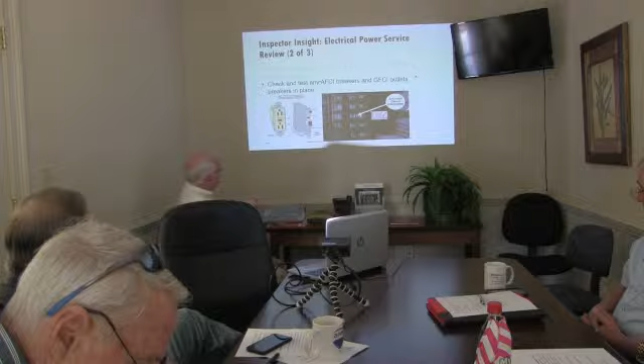So GFCI, pretty common, that's what you commonly see today. AFCIs are breakers, specifically in the panel, and they'll have a button definition, and typically will say AFCI on there. Today there are AFCI, GFCI combination breakers used for new construction, and fundamentally they are in combination with kitchen areas only, because kitchen areas are required to be GFCIs, and engineers have devised a breaker that functions in both capacities.

Arc fault means arcing, GFCI is grounding. Grounding systems protect you - it's personal protection. Arc fault systems are a protection for the structure itself and reducing fire opportunity.

Check all accessible power receptacles throughout the house, as well as switches. Flipping switches, try to at least see what it turns on, what it turns off, and if it works. I've seen those that are floppy, and those that are floppy just need to be replaced - they're just wore out.

Inspect smoke and other detection systems. Smoke alarm systems today are required throughout the house. Every level of the house has to have a smoke detector system in place. In a sleeping area, it has to be within 10 foot of the door and has to be in the room. They all have to be hardwired together - when one sounds, they all sound.

That's probably one of the things I find most common as an issue - when one sounds, they don't all sound. They have to be hardwired today. Now, before that, you've got grandfathering issues. Obviously a house built in the 70s and even into the early 80s, they're probably not going to be, if they're there at all, hardwired from the builder standpoint. But you can hardwire them, and it's recommended.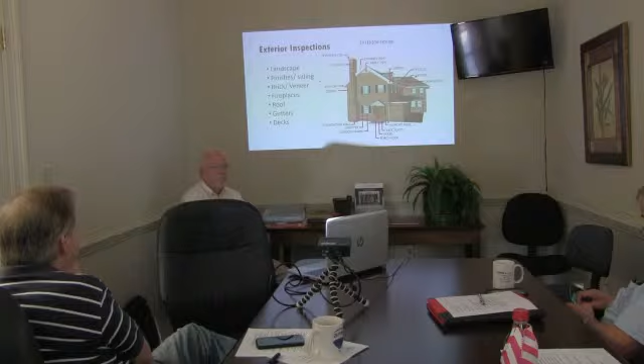Exterior inspections dealing with landscape, finish siding, brick.

Anyone have a question about anything we've just gone through here? I'm pushing through these things because we've got so much material, but if you have a question, just chime out and we'll touch base on it.

Landscaping, finishing, siding, brick veneers, fireplaces - which in this case we're talking about the chimney - gutters and decks.

Trees, shrub location, where they're found around the house. Anything that's within 10 foot of a foundation wall can be problematic, regardless of how old it is. If it's not old and it's left there, it's going to get old and it will probably affect the foundation very likely at some point in time.

Obviously, you can see here this is an issue. Tree contact to roofs, siding materials, that basically is no different than sandpaper. Over the course of time, it'll wear away roof material, it'll wear away siding material. It is a highway for vermin into the house, guaranteed. Insects, it doesn't matter. In contact like this, it's an issue.

Overgrown shrubbery. All of those things have issues involved with them.

All right, different siding materials. Commonly today we find basically 3 or 4, let's say 4 different types. Cement fiber board, HardiePlank is a brand name. There are other people who make cement fiber board materials out there, so I don't call it HardiePlank because it could be Nichiha, or something from any number of other companies currently making fiber board or cement fiber board material.

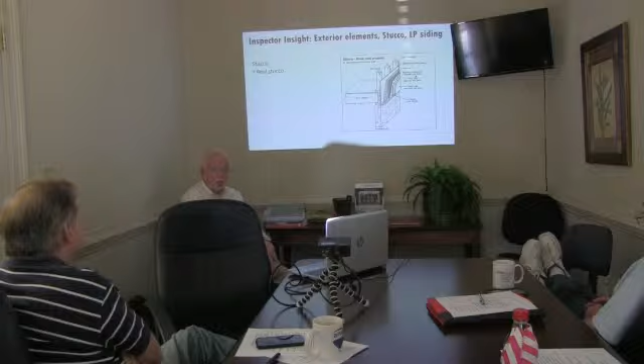The two types that are most common today are what's called hard coat, and the other is synthetic stucco, which we'll talk about shortly. Hard coat simply is a hard coat gypsum board and then the application of various levels of finished material to create the stucco exterior.

There are standards expected to be in place with the installation of this. It cannot terminate in the ground. I'll guarantee you, if we went two miles from here and found a stucco house, it'll terminate in the ground. It has to terminate above ground with proper weeping to allow for moisture expulsion.

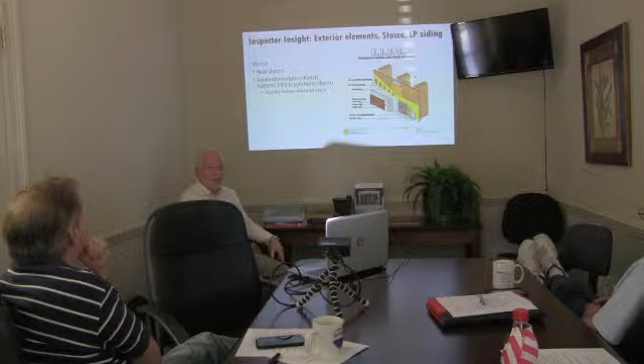Exterior EIFS, exterior insulation finish systems, that's what EIFS represents, which is a synthetic stucco. Basically, instead of a hard gypsum board, it's put on a sponge, which is basically styrofoam. And to that point, when it's not installed correctly, it absorbs moisture. Moisture stays there, and you can imagine what it does.

Two elements to be easily detected: peeling is a potential issue you can find with some of these materials, but with EIFS material or synthetic stucco, you tap on it. If it sounds hard and solid, it's probably hard coat. If it sounds hollow, more than likely it's synthetic. You can push on it, and if it gives slightly, it's probably soft or simulated material.

Question: are you telling me that both stucco systems, hard coat and EIFS or synthetic stucco, are problematic and need to terminate above grade? Absolutely, yes. Period, they all have to terminate above grade. It's been in the code for a long time.

Yeah, I know about the synthetic, but I didn't think the hard coat had to be terminated above grade.

The issue is that when it gets below grade, it's not unlike masonry, where at the base level of a masonry exterior brick material it basically uses a ledge element of the foundation as the starting point, and therefore has a support system. The others don't—they're just cladded materials, just like siding material.

Yeah, I know termites used to get up through the synthetic stucco, through the foam. But with a hard coat, you're right against the OSB board and wire and all that stuff. But you cannot ensure that it's terminated correctly, so there's a weep system that's supposed to be installed.

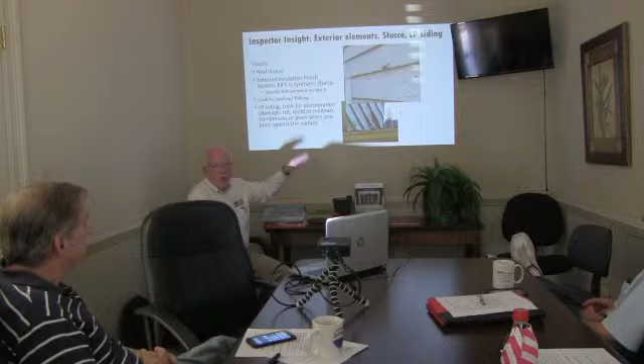Gotcha. I went past that picture relatively quick, but it's in that diagram—there is a weep screed that runs across the front of it.

Here are two other elements. The first picture you see is an OSB board. The bottom is LP siding. All I had to do was look at the gutter and know what the rest of the house was going to look like. But anyways, LP siding, Louisiana Pacific, moisture contamination—all those things take place.

All right, hard coat. This is the house that I looked at about two years ago.

It's about a $1.5 million house, 4-sided hard coat stucco. I do not do stucco inspections myself - there's a training procedure, and it's a probative, lengthy inspection, especially for a house this size. I went through the house and did the primary inspection, and one of my associates came out and did the stucco inspection.

Oh, I'm sorry, the back one - I don't want to show you that one yet. We'll take a look at that one.

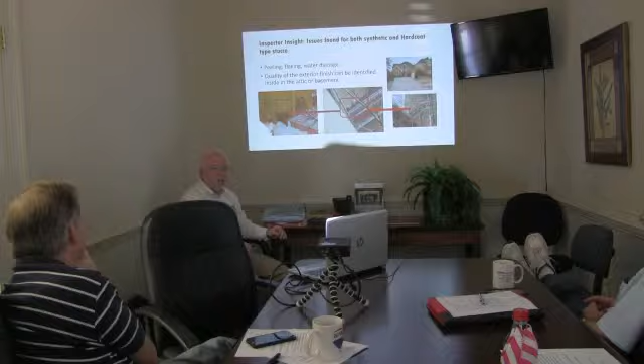Stucco has a particular type of flashing material that has to be in place in order to divert water, especially when you have a transition between a vertical wall and asphalt shingle or roofing material that's in place. If it's not done properly, water gets in, it will deteriorate, and it'll cause problems.

The client did not buy this house. But they bought another house, very nicely - a very nice house, very good. No, it wasn't stucco.

Decks. As of 2014, Georgia issued a prescriptive on decks, saying that decks have to conform to a standard which they provide, or an engineered system. Engineering simply means that it is designed by an engineer, has an engineered seal on it, and has been approved by the municipality that oversees that.

Okay? That is a beautiful deck. That deck has got 1, 2, 3, 4, 5 errors without even me walking under it, that I can tell you right away. They're in place.

Your railing has no newel posts. It's all supported by pickets. Not acceptable. Cannot be done.

It's hard to see there, but at this corner right here, this deck is applied against a brick veneer. You cannot put a deck on a brick veneer without it being what's called freestanding. Cannot be done. The Georgia prescriptive requires a limited distance off of the house main framing mounting ledger board.

Which is the board that's - don't pull the blinds in, let me close that down because I think that blind is... they must see that one back there. Okay, well that's okay. All right, that's it.

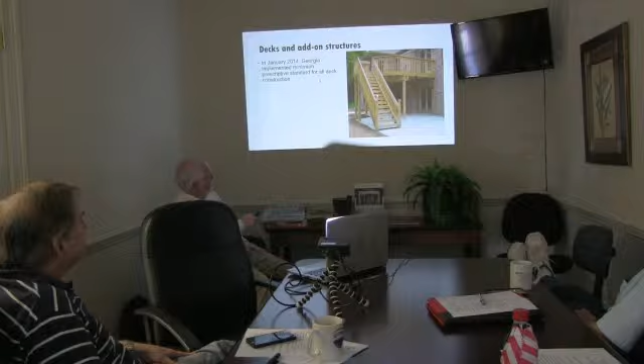Well, the steps themselves have to be a minimum of 36 inches wide. That's number 1. And then number 2, once you do that, it has to have a center stringer on it. Wow. It has no graspable handrail. And there probably are several other things that I can see just from looking at the picture.

Let me flip this next string. It's a 22-page outline detail for decks.

New construction doesn't often go this distance, but I went to Dawsonville last year on probably about a $1.5 million house, with a monstrous deck on it, and the guy did everything wrong.

And let me say this about code - there is no municipality in the state that decides not to enforce a particular code. It's a state mandate. The county, the municipality, wherever - and the builder says, well, we don't do that up here in Dawson County, the inspector doesn't require that. And I told the client, I don't care what Dawson County does.

So is this Georgia or federal we're talking about here? This would be state of Georgia. Yeah, I don't know that there are any really federal guidelines. All these things pretty much are left to the states where they manage it.

In any case, as you can see, DCA is state of Georgia. I know you don't have time to write all this down, but this information is available online from the DCA state Georgia site, development codes, and you can pick them up. They go back numbers of years as to what the requirements are.

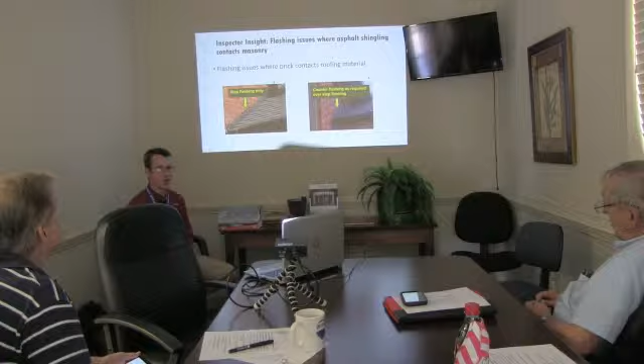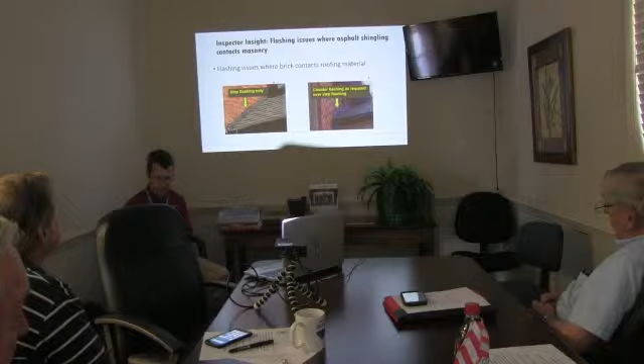A note about brick - there's a flashing detail in brick that's of special note. On the left side you see the step flashing - that has step flashing only, and you can see the different pieces. You can see the end of it pops out, maybe into the gutter, and that would be good. But the needed flashing is on top of that, and it's the counter flashing. That top edge of each individual section is actually supposed to be embedded into the brick - the brick is scored, it's mortared in and sealed up in there so you don't get water behind. This caulking edge will crack over time, and it's a maintenance issue. So brick is a little bit more difficult to flash than, say, a concrete-based siding.

Everybody's heard of Atlas Chalet. It's starting to go away a little bit just because of time - Atlas Chalet shingles have been replaced. But for a period, if a roof actually starts leaking within a year with Atlas Chalet, it's obviously a roof problem, a shingle problem, and they can have that replaced. But they're not making them anymore, so it's a moot issue as far as that's concerned.

It led to a class action lawsuit because there were a lot of Atlas Chalet shingles that were recalled. Well, it wasn't actually a recall - they went to litigation, but it isn't actually a lawsuit. So it's not a class action suit where everybody can just say, hey, I got Atlas Chalet, please replace it, and they will. You actually have to have evidence that it's defective, with a leak or visible pitting and cracking.

While I'm thinking about it, polybutylene had a class action lawsuit and a recall. Atlas Chalet are the two big ones, and then of course Louisiana Pacific, who got the brunt of all the pressboard siding issues. There are a lot of recalled items - maybe 1,000 of them. Home inspectors are not required to list every recalled item, but it's nice if it's mentioned because it had an issue, like polybutylene and these type of shingles.

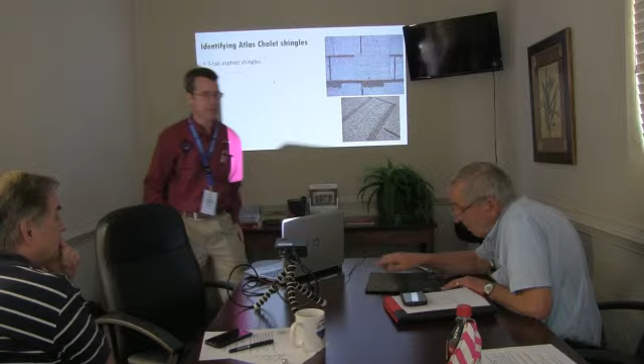But you can take a look at that, and you can see the pitting right there. It blisters. The overlay property of this actually wasn't applied properly, and water gets underneath there. And I heard that when water gets underneath there, it doesn't look like it's leaking from the underside, but what actually happens is it rots out the top half of the roof decking, so your decking gets weak and soft without you even getting a leak on the house. But you can see a crack right here in this one. These are the two typical problems that Atlas Chalet has.

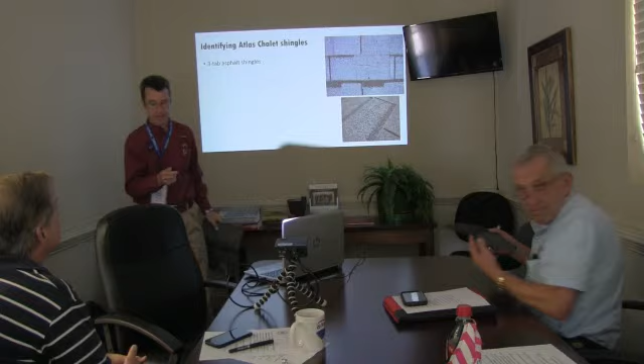So it is a 3-tab shingle. It's a dimensional texture, a faux architectural, so it does actually look like an architectural shingle. At first you look at it and say, oh, nice architectural roof, but it's not. It's a 3-tab.

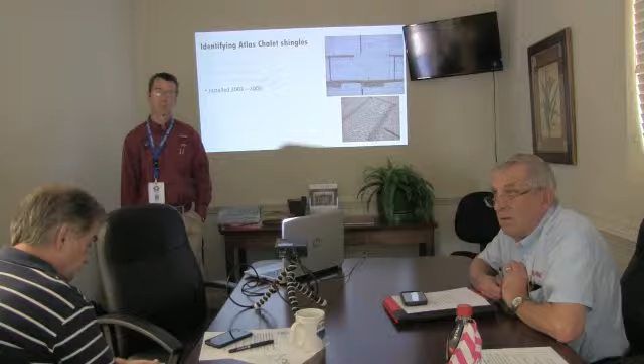I haven't touched on this subject in quite a while, so I'd help getting a refresher on it. Years ago in a real estate contract, paragraph 12, 13, 14 or so, it said something about any defects that have been known — they specifically called out polybutylene plumbing and all that stuff. It says if the buyer has been notified prior to contracting to purchase, so if in those disclosures any known defects like Atlas Chalet or polybutylene are in there, then basically they're being told all bets are off, you've been told. They've changed those disclosures, and we were missing a lot of things, like aren't we missing the class action suit paragraph? It's not in there anymore.

Age of shingles, age of HVACs, sellers age of water heaters — which I thought was very important. From the get-go, if I'm listing a house and I walk around, I can identify polybutylene, I can identify LP, and you tell sellers they've got it. Now some are totally unaware there's a problem. Some will say they're unaware, but they actually participated in the class action lawsuit, got the money, got 30 grand to reside the house, and went out and bought a new F-150 truck instead. But most sellers today don't have anything wrong about that at all, or don't have anything at all — they're totally unaware that they've got polybutylene. They'll tell you they don't know there's any problems with stucco, and they'll tell you LP, what's that? They have no idea. Let's carry on.

Anything installed — well, they're typically installed, not any shingle, but the Atlas Chalet was installed between '03 and '09. So that's actually different now. When we were setting this up, it's actually 8 to 14 years. So the shingle is getting old naturally anyway, and it's being replaced just because it's old.

The Atlas logo is on the cellophane. If you notice on the back of this, if you flip over that shingle, this is really the telltale sign to make sure you've got either Atlas Chalet or Owens Corning or whatever. You got a picture in there. You flip up the side of the shingle at the rake, flip that up and look in there, and that's what you see. You actually see Atlas. That's a cellophane strip that'll stay on most every shingle.

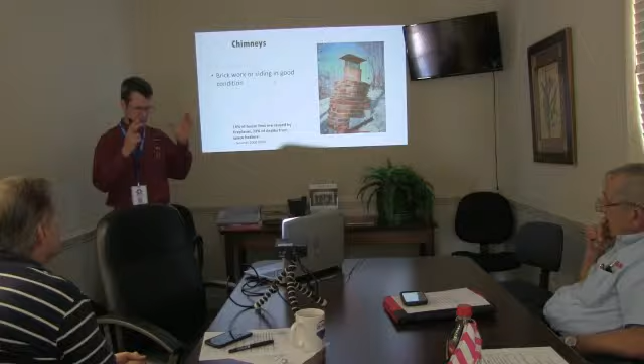What you're looking for in fireplaces: you need a cap, and you need a top also. That top, if it protrudes past the siding, is important, particularly with pressboard siding, which is often the first to go around chimneys because the top does not protrude out past the siding. It has no protection from a mist or light rain, so it always gets wet.

Brick chimneys actually have the mortar sloped on top, so that's their top, but it doesn't protrude out past the brick. You'll get what's called spalling - that's when moisture gets inside the brick and freezes. You get the rain and then the ice storms, and it pops the edges of the brick apart. So you're looking for a straight chimney with the proper flashing around it - step flashing, kick-out flashing.

Is that more susceptible in a chimney environment than the rest of the house? Basically because of the top of the chimney, not the cap, but the part that actually protrudes over. There are two issues - one has to do with the siding, and it has partly to do with the age of the brick itself and the way it was made and fired. Some older bricks, whatever the material composition used along with the clay, absorb moisture. I see this more with properties that are probably pre-1970, where the brick was just not made well, and it absorbs moisture and basically does this.

I mean, obviously this is an exaggeration of the picture you're seeing here. Notice there's no overhang from the eaves or the edge of a roof - there's nothing protecting that from any rain at all. Chimney cap is in good shape - we'll check that, and no obstruction from trees close by, which would be a fire hazard and so forth.